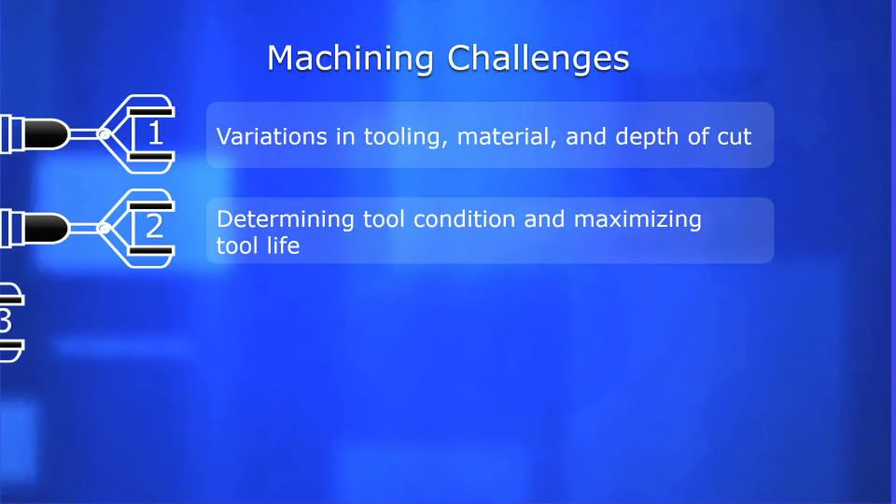Number 3: reduced reliability of skilled workers and relying heavily on unattended operations. We all know the difficulty with our labor force, specifically at the operator level. I have seen more robots in the last 2 years than one could imagine. This isn't going away. So what's next in our current climate? The lowest entry point cost-wise to satisfy orders is for customers to optimize their current equipment.

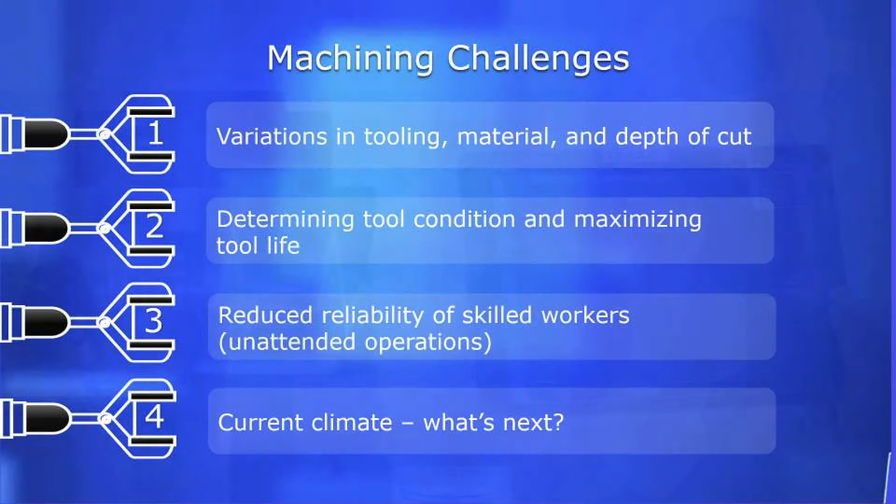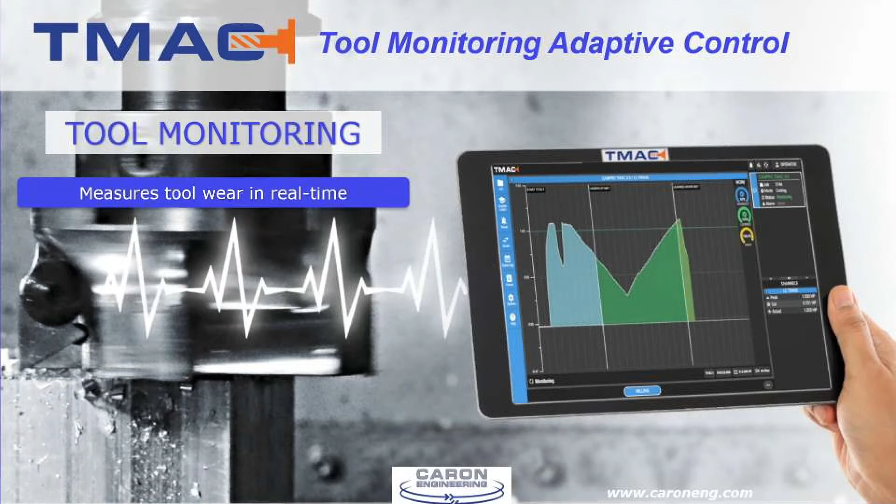So what I want to do is introduce the solution to all of these problems. That solution is TMAC. TMAC stands for Tool Monitoring Adaptive Control. In this slide, we're going to evaluate the tool monitoring aspect. TMAC measures tool wear in real time. It utilizes a high-resolution sensor to determine if a tool is worn or broken.

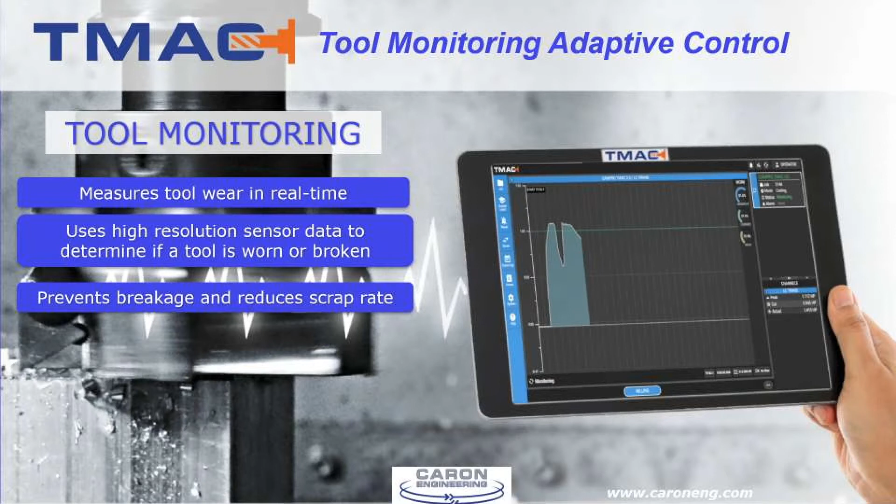We prevent breakage and reduce scrap rate by setting accurate limits around each tool and each cut. TMAC provides an enormous amount of valuable information about your cutting process. And finally, it eliminates the need for operator intervention.

So here with our adaptive control, we automatically regulate your feed rate through variations in your material, your depth of cut, and your tooling. It's going to optimize cutting, reduce your cycle time, and allow unattended lights-out operation. Adaptive also reduces the cost of consumable tooling by increasing your tool life. We do this by making 1% increment changes in your feed rate in order to react to harder and softer material conditions.

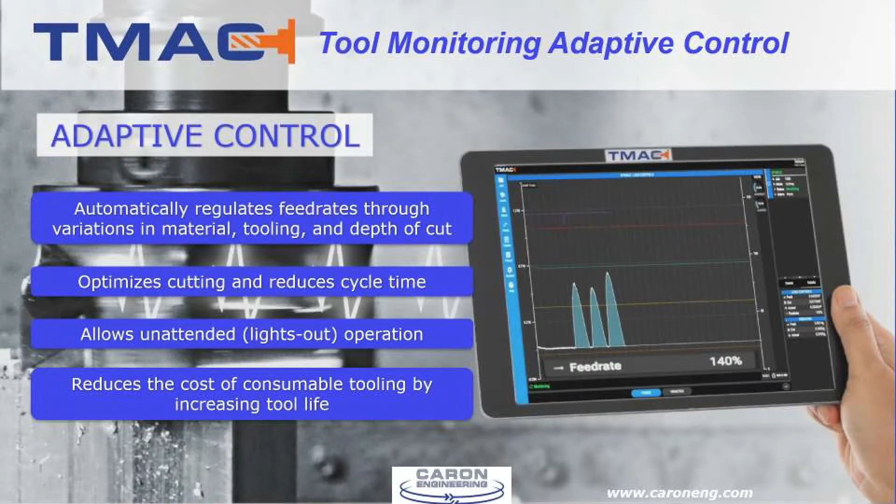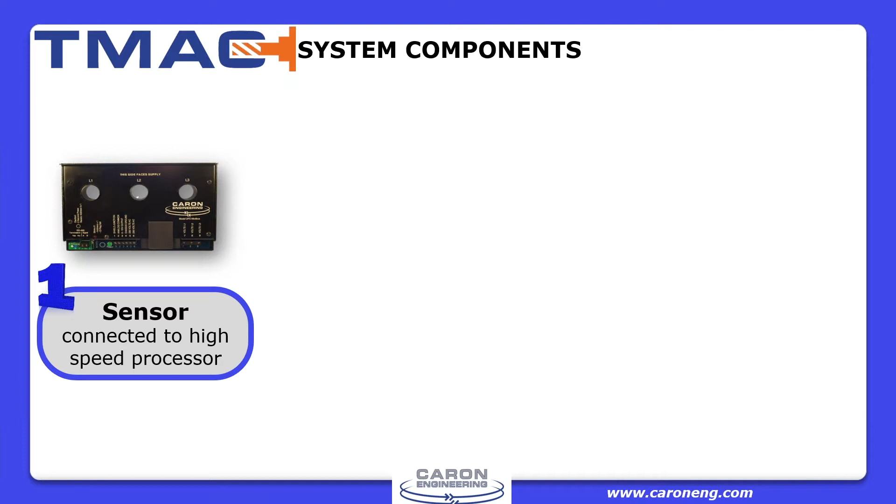So here's a pretty standard example of our system components with TMAC. First, we have a sensor connected to our high-speed processor. The sensor is an auto-scaling Hall effect transducer. It's mounted in your electrical cabinet between the spindle and the drive. This measures true motor horsepower.

Next, we have our high-speed processor. This is a dedicated Linux-based system that's installed in the machine cabinet. This connects your sensor to your CNC control. It's important to note that CNC controls only allow a small amount of processing power. That's why we use our own system. It also allows instantaneous reaction to conditions with real-time machine interfacing.

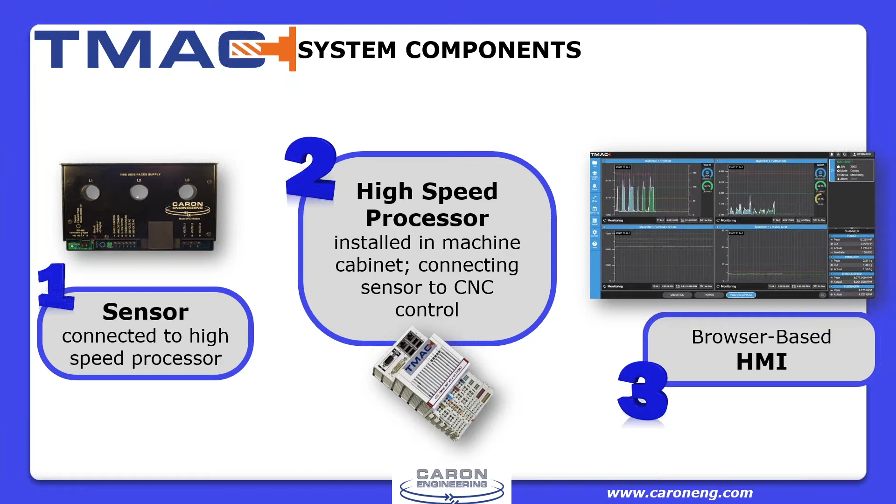The third part of our system is our browser-based HMI. The TMAC processor houses its own web server to allow remote real-time monitoring from any network device. This is also entirely configurable to different password-protected interaction from supervisor to operator levels.

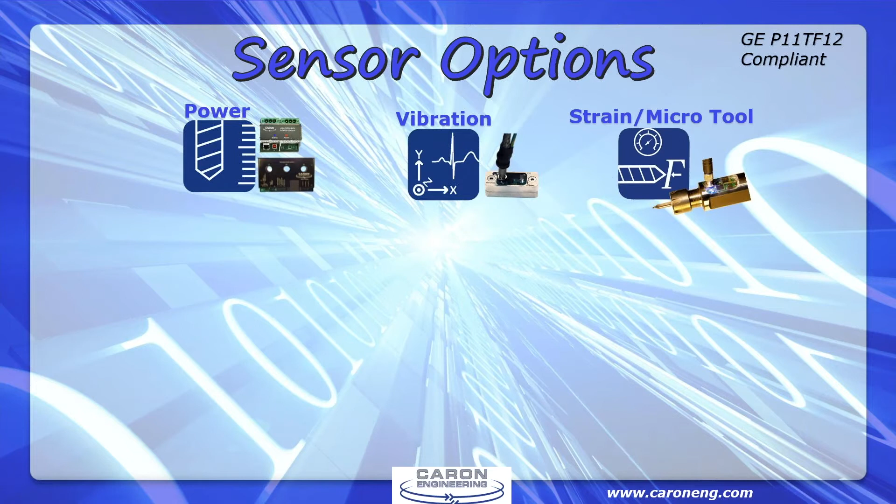Here we have some sensor options: power, vibration, strain, or a micro tool sensor. We can monitor coolant flow, pressure, and spindle speed. All of the sensors can be used by TMAC to react to anomalies in the normal machining operation. We also can take a 0 to 10 volt or 4 to 20 milliamp input as well for sensors that we don't commonly support.

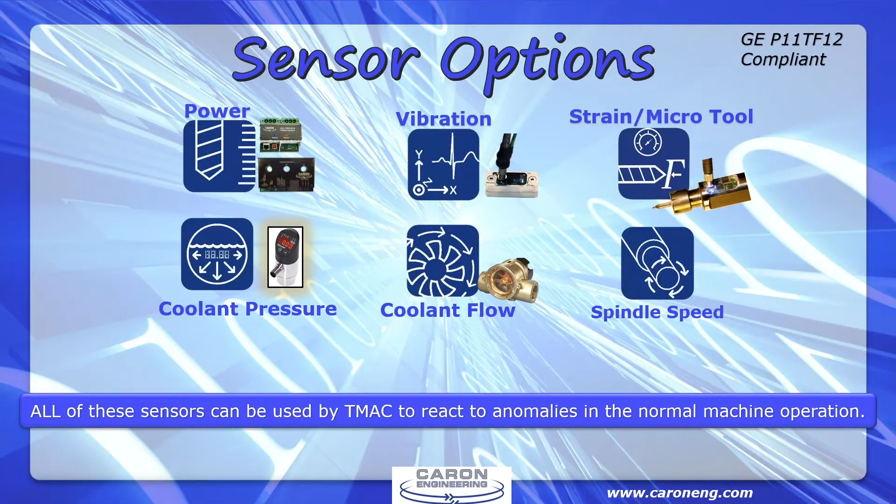Here, TMAC monitors multiple processes and sensor channels simultaneously. On this particular graphic, you can see the 4 quadrants of horsepower, vibration, spindle speed, and coolant. TMAC cannot be overloaded by any of these, and it's fully capable of monitoring all of those simultaneously and more.

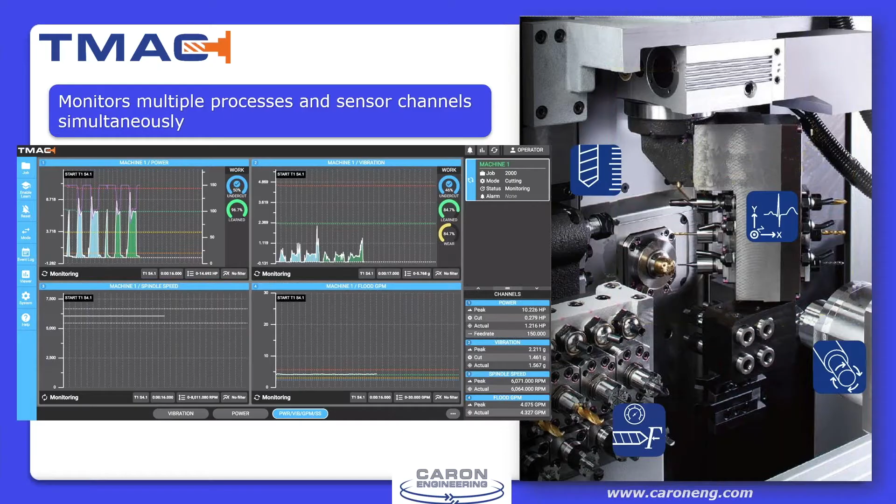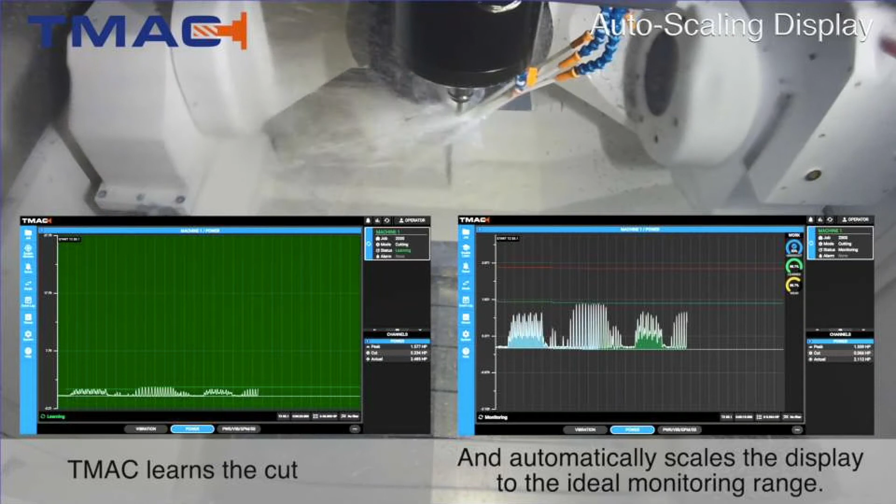So TMAC first learns the cut. The screen turns green and we grab the peak horsepower value of each tool in each cut. TMAC learns that peak power, latches onto it, and then when you're in monitoring mode, it automatically scales the display to the ideal monitoring range.

So how does it work? TMAC uses different monitoring modes based on the specific operations being monitored. So we have fixed limits, work, and adaptive control in our toolbox. TMAC learns the peak power and area under the curve, or work, of the cutting tool and can detect tool wear by monitoring these parameters.

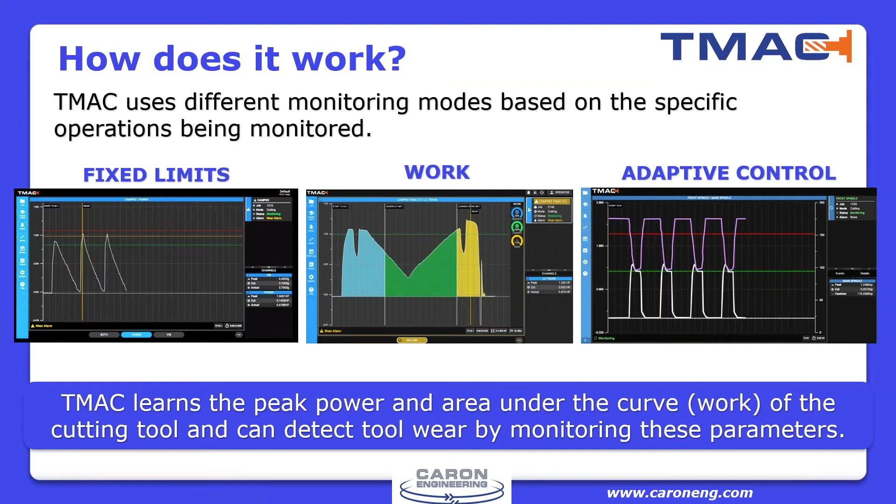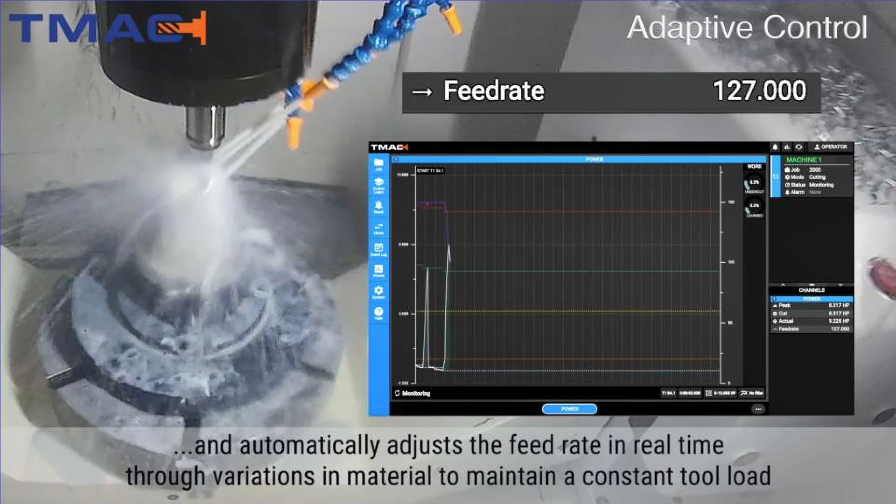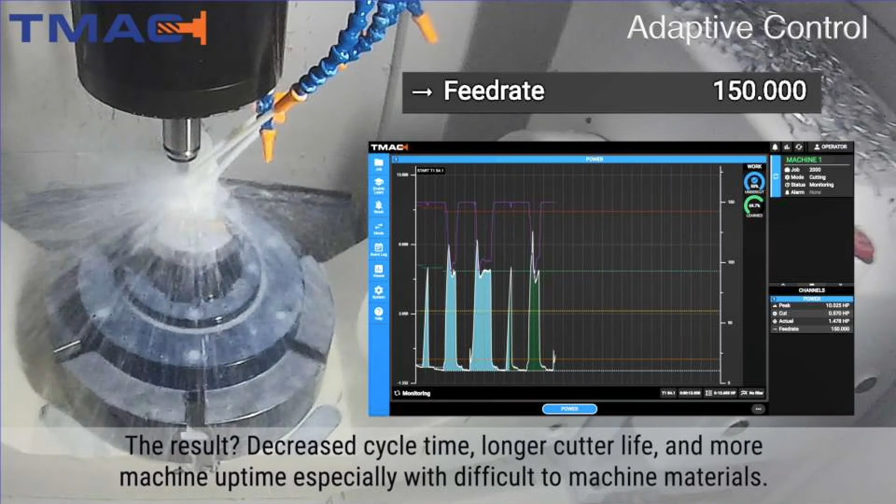Here we have our adaptive control. Without adaptive, a constant feed rate is set based on the safest or worst material condition. With adaptive, TMAC learns the optimal power and automatically adjusts that feed rate based on the load. So what's the result? Decreased cycle time, longer cutter life, and more machine uptime, especially with difficult to machine materials. With our new browser-based UI, you can access TMAC anytime, anywhere, and from any network connected device.

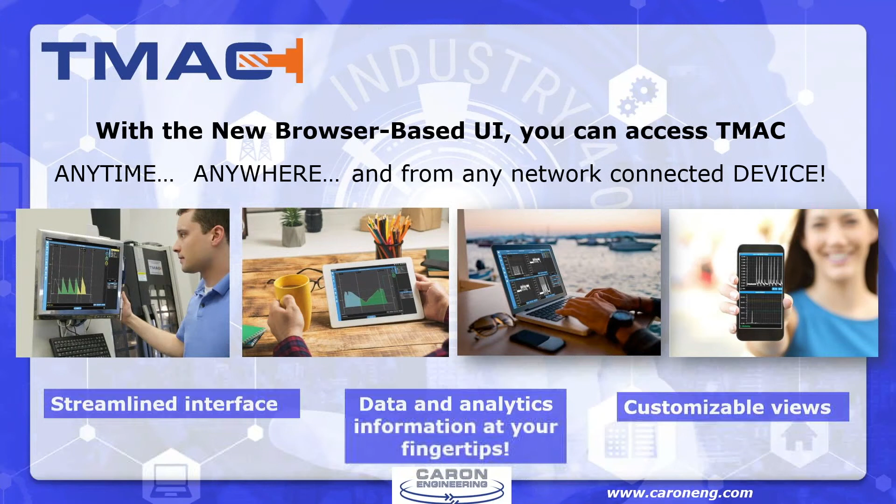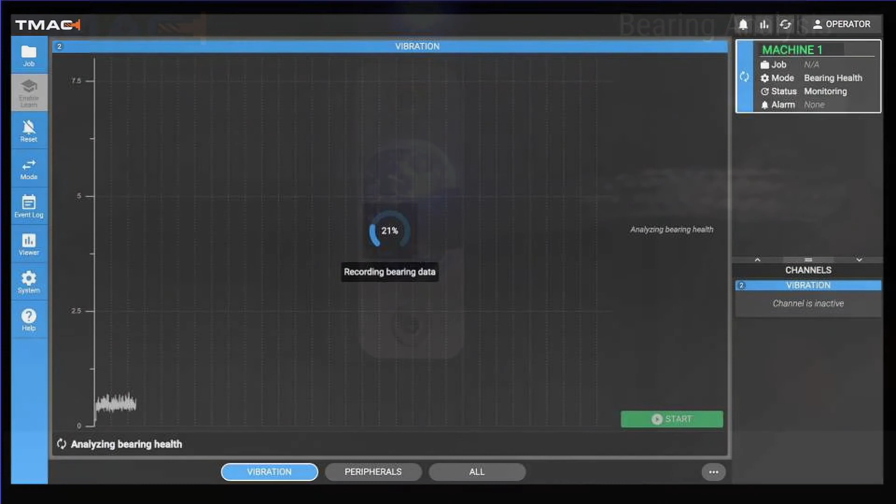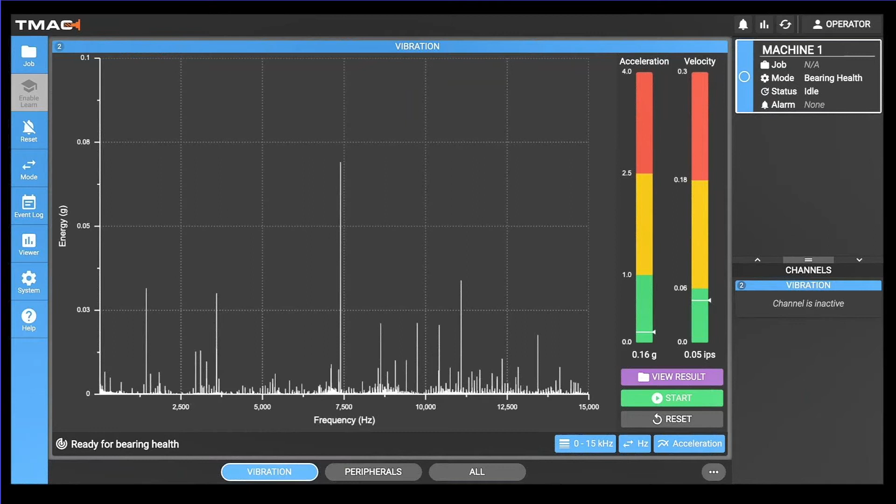By using a vibration sensor attached to the spindle, TMAC can monitor spindle bearing health. So what we do is we put a low mass tool in the spindle, we ramp that spindle up to its highest RPM, and we do a 5-second analysis of acceleration and velocity. And you have now access to your spindle being in good condition, on its way out, or bad. All of this data can be trended over time and networked to your maintenance department so they can have those data files at a glance.

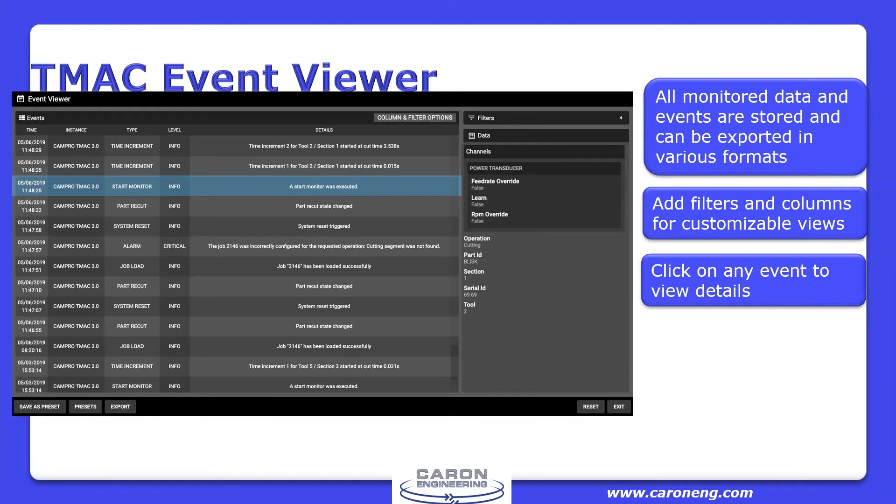Finally, we have a TMAC event viewer. All these monitored data and events are stored and can be exported in different formats. So you can also add filters, columns, and other customizable views. So you simply can click on any event and view those details. So now let's go check out our on-machine demo.

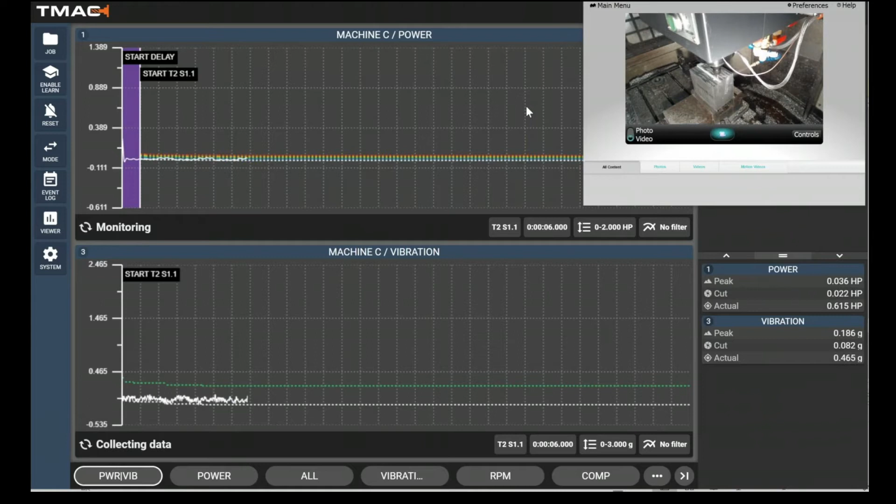What we have in the background, folks, is our TMAC 3.0 system running. In the upper right-hand corner, you see the webcam of the inside of this 3-axis mill that we're running our demo on today. So this is a 1mm drill. 1, 2, and 3. Also, it's important to note that down below, we're actually also measuring the vibration. We have a vibration sensor mounted in the machine as well.

And we're coming up with a 13/64 drill. You'll see the start command come in, long vertical line, and we have limit set. So here we're measuring these drills, these holes, using area under the curve. Once again, the blue is the satisfaction of the area under the curve. So we're saying enough power was consumed to satisfy that that drill is there. Next tool is a 1/4-20 tap. This is simply tapping the 13/64 drill.

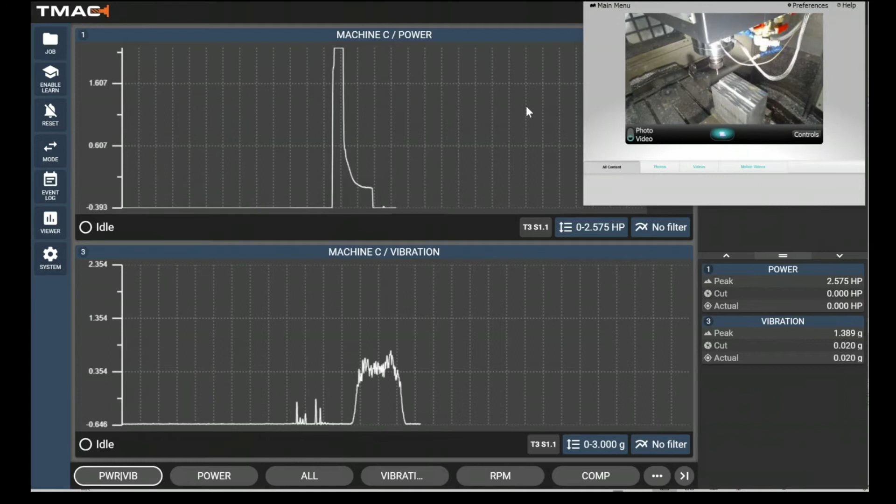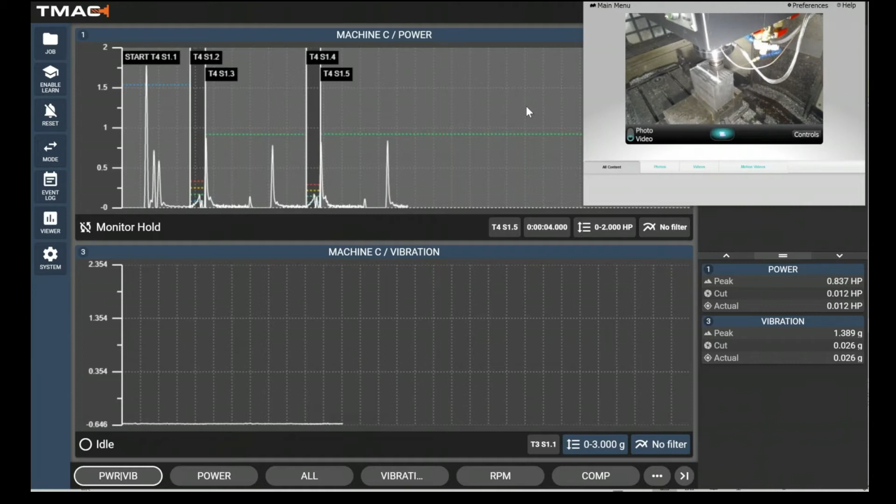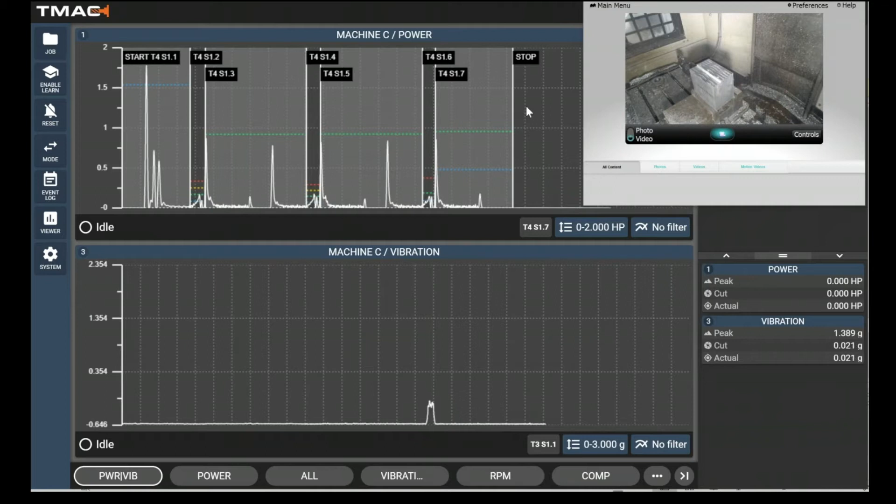Now you're going to see the screen actually flash a couple of different colors. The gray basically means we're doing a monitor hold. So in a tap sequence, and this is unique to us, you're going to capture a spike in power on the reversal of the spindle. So we actually ignore all of that and just capture the actual forward cutting of that tap. And we can set those parameters. So that's kind of what you're seeing in the screen there.

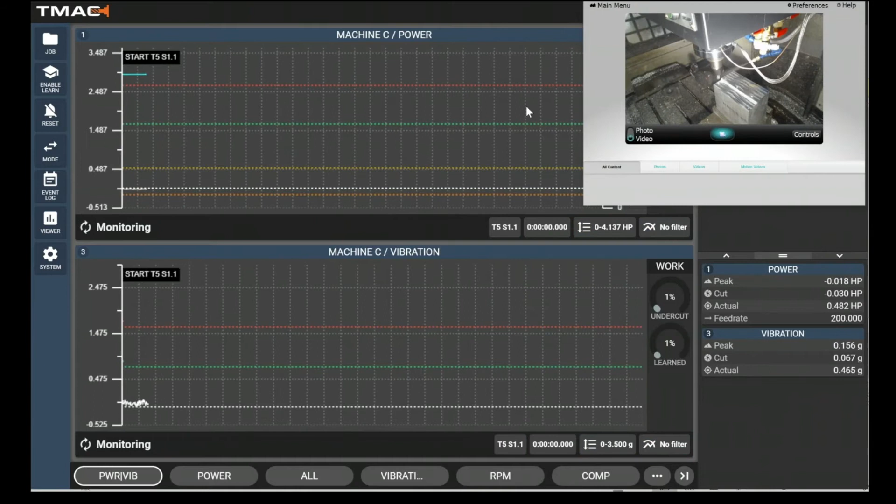And then finally, we're going to come in with that 1/2-inch 2-flute end mill. Full depth of cut on the first pass. Now this is an adaptive cut. So we are going to see the variation in the feed rate based on the amount of power being achieved by the tool. So that inverse relationship is represented there on the top of your screen. It's also interesting to note that the vibration signature follows the horsepower signature really closely.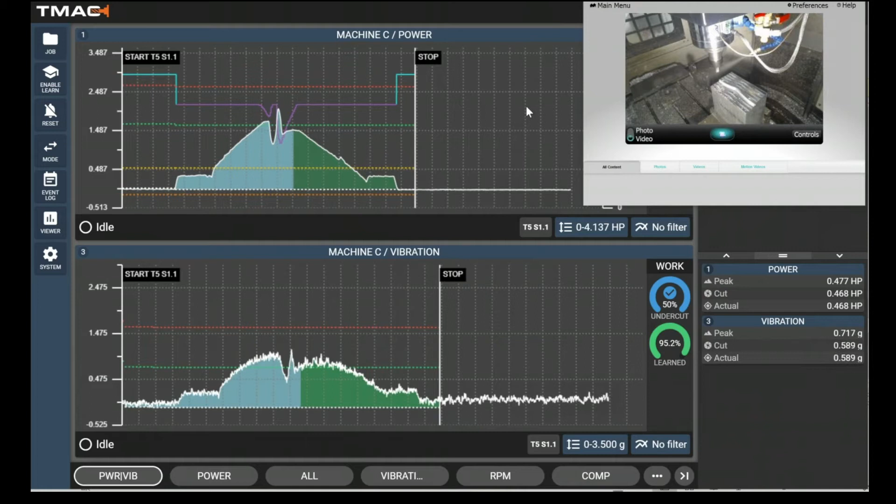Now next cut is a 1/2 depth of cut, essentially cleaning up the first pass, if you will. So we're satisfying that blue, saying enough undercut was met. That essentially will start to turn green, saying we're satisfying the cut. And if it were to get to a point where we're achieving more power and getting into a wear condition, that would then shade yellow. It's the final cut. And this is just cleaning it right up, the whole phase.

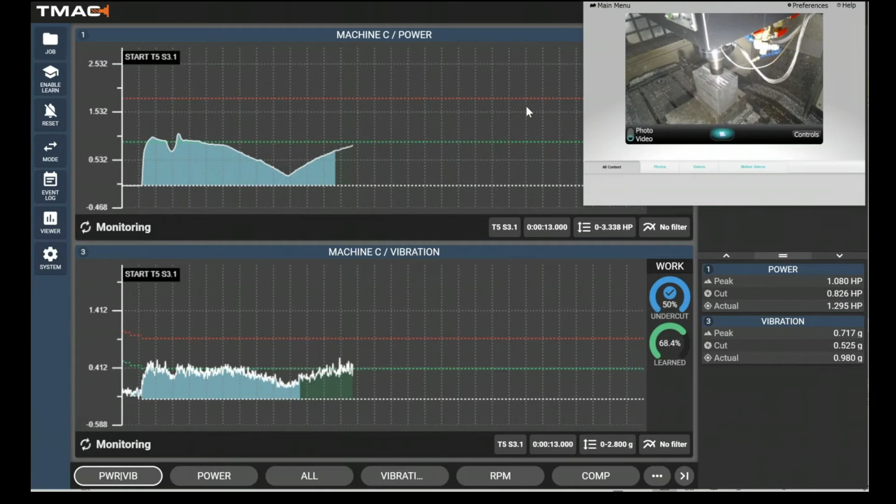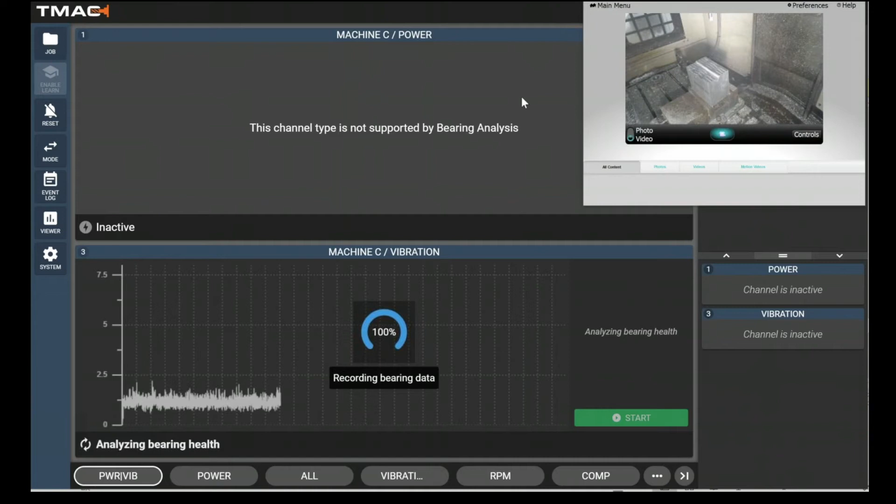And finally, we're doing a bearing analysis for you. We ramp the spindle up to its highest RPM in a low mass tool, take that 5-second sample, and do the analysis of acceleration and velocity. And you'll see the end result here in a moment. And we do know that the velocity shows our spindle is actually not that healthy.

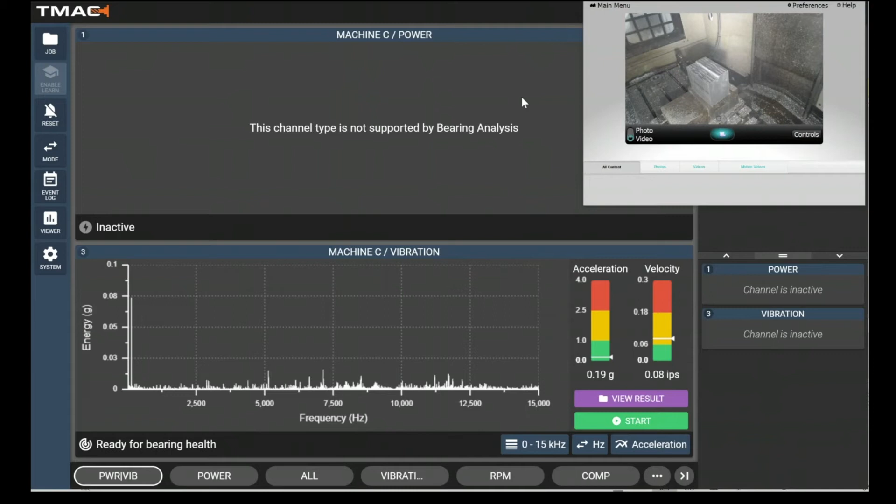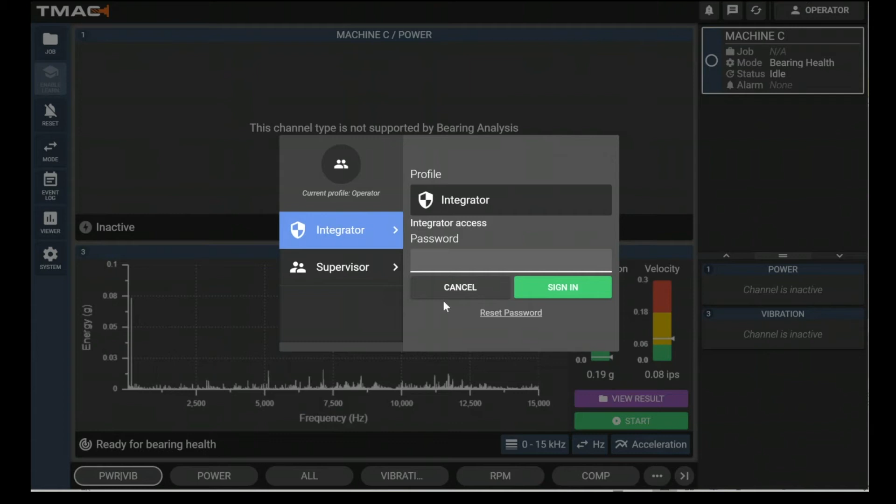So I'm going to maneuver through how to get around TMAC 3.0. First of all, on the top right part of the screen, there's the label of the machine. It could be machine number, whatever you want it to be, job, mode, or status, and if it's in an alarm state. Up here, we actually have the ability to do permissions for operator level, supervisor level, integrator level, depending on the situation, to password protect, and we can permit them to do certain functions of interacting with TMAC.

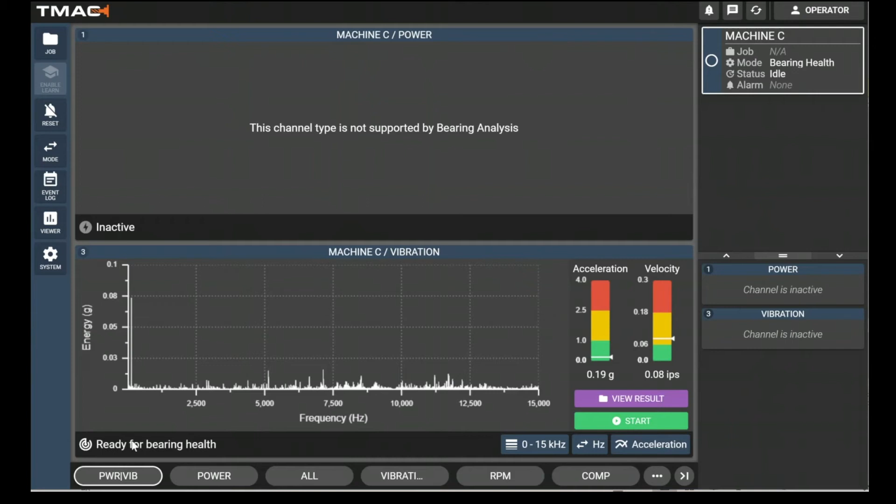So I'm going to show you down here at the bottom, we got power, vibration. You can basically create custom screens to show all of these things happening simultaneously if you prefer. Here on the left column, we have job, enable learn to turn a learn on manually, reset, mode functionality, event log, viewer, and system. So in the job, this is where you interact with your jobs. So TMAC is job-based. So once you learn a part program, it's saved. This would be how you interact with it.

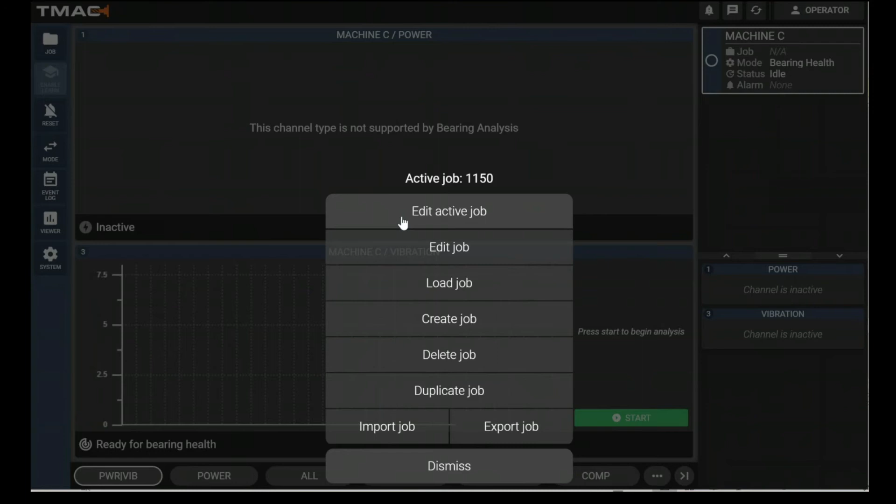So I'm going to edit active job and show you the current job that we just monitored. Tool 2, Tool 3, Tool 4, Tool 5. These are also represented by sections. So on Tool 5, we're actually doing 3 different operations. Okay.

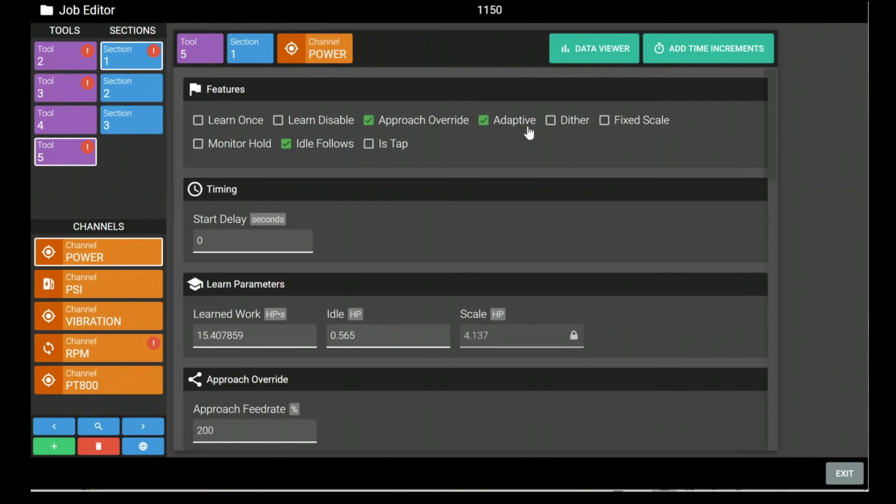The first was that full depth cut with adaptive, as you can see here by this radio button being selected. Tool 2, here's an example where we're using basically fixed limits. If you wanted to turn area under the curve on, you would simply click that to turn the work calculation on. So these are the different channels down here on the left: power, PSI, vibration.

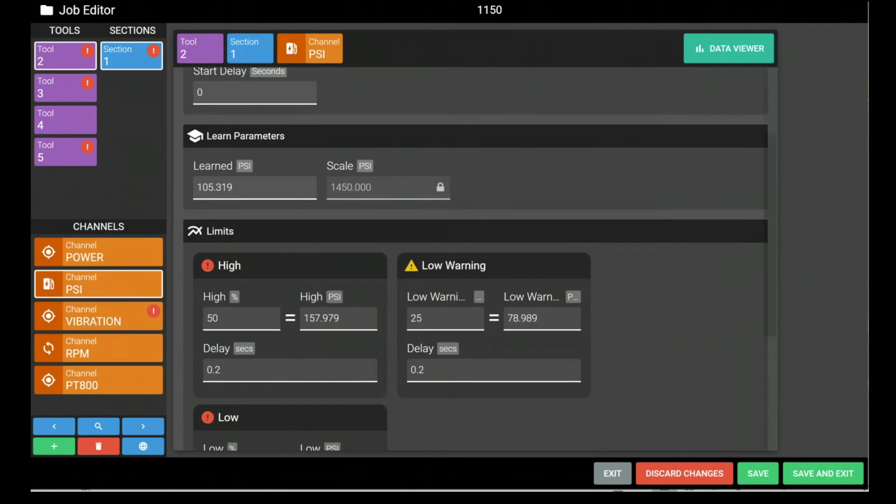This is where you essentially set it all up. This is where you set your parameters. So we learned this value here in the learn parameters, the horsepower, peak power achieved. And then this is where you set your alarm states. There's also filter options and whatnot.

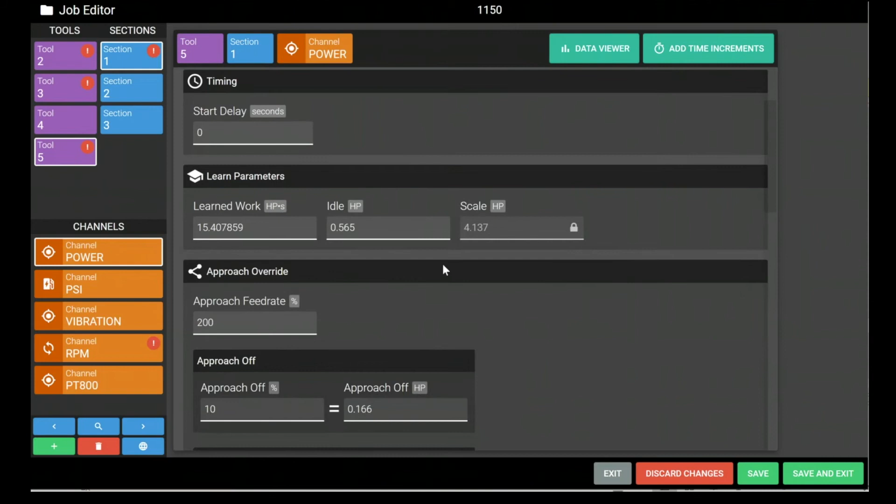It's important to note with adaptive that we can also do things like turn approach on and off, and that was that rate of change calculation I was telling you about. But we also can tell adaptive to speed up a certain amount, traditionally up to 255% of the program feed rate, but also slow it down if need be. So it really is a tool that can be used for multiple applications.

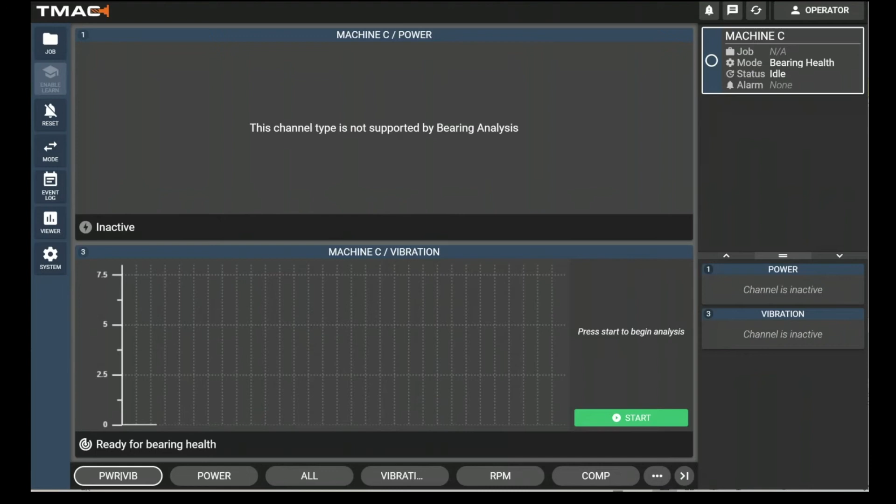I also wanted to show you our viewer function. So what viewer does is it pulls up an additional browser, just pulling it up here. We can do an analysis of bearing health, millivolt, or cutting. I want to look at cutting. So this pulls up the most recent cut, right? You can scale back and forth, previous, next.

I want to show you the power of being able to analyze a tool, for example. I'll remove this. These are all the recordings of every tool that we've been monitoring and actually learning. I'm going to add a filter, and I'm going to pull up tool 5, which is that half-inch end mill. And I want to do an analysis of when we learned it at 100% feed rate, and when we turned adaptive on up to 150% feed rate override, and do a quick analysis to see how much time we saved.

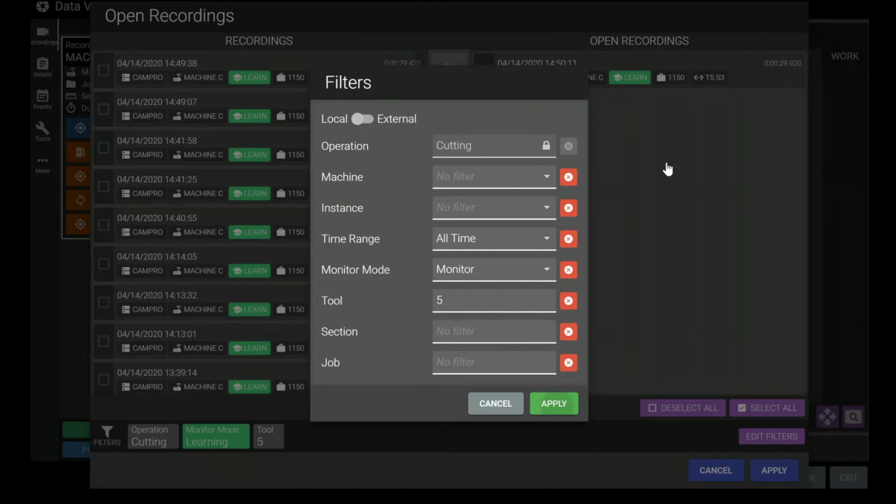So I'm going to pull up the learn file first. So I'm just adding a filter, tool 5. And I'll apply that. And I'll just pull the most recent one, and that just happened. It's all time and date stamped. And then I'm just going to pull up the monitor version of that same tool. It's also important to note tool 5, T5, S3, that's the tool and section. There's also a motor designation too if we were using a multitasking machine.

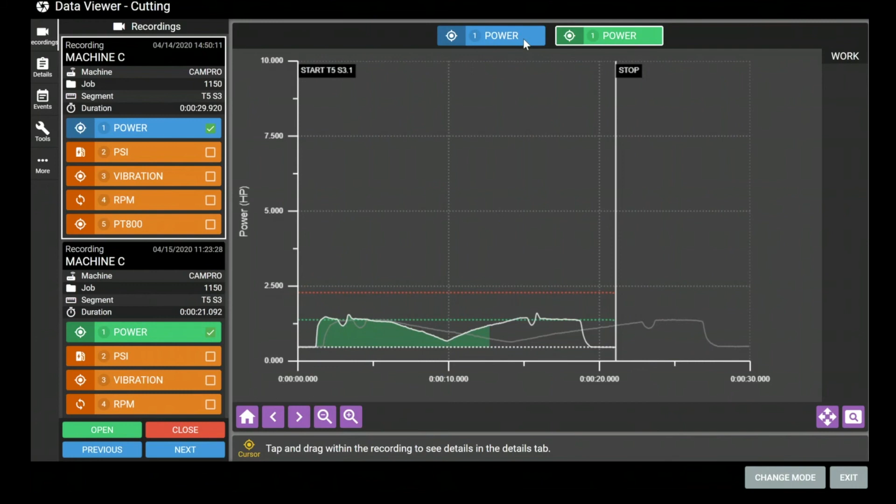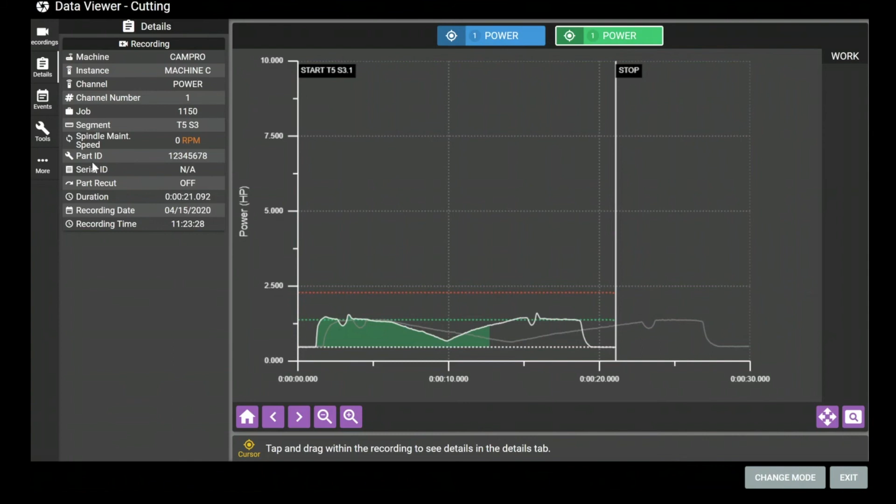Pull this monitor. So now I've got these two. I'm going to hit apply. Now they're overlaid on top of each other, so I can toggle between the two and show you that on the learned one, I'm going to pull up the details. We have details to show cursor, where you were, events as well. This duration on this particular cut took almost 30 seconds. Now with the adaptive cut, we actually are seeing the duration of 21.09 seconds. So we shaved about 9 seconds off of this tool using adaptive.

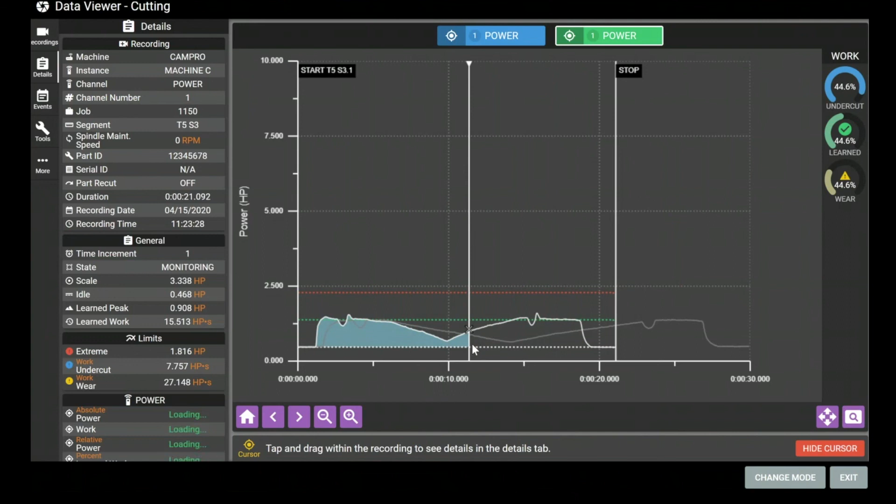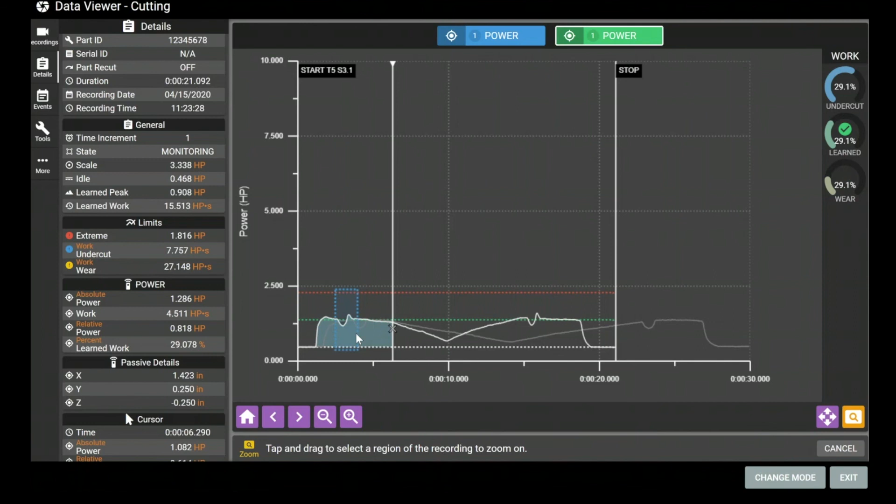Another analysis you can do, you can pan, click, zoom. So wherever you are with the cursor, we satisfied at the undercut, for example. We're going to show things like your limits, what percentage you would satisfy, the power, the relative power, but also passive details like axis position in the machine. Or we can zoom in. Maybe I want to look at this area here. I draw a box and it zooms in, and I can continue to zoom in.

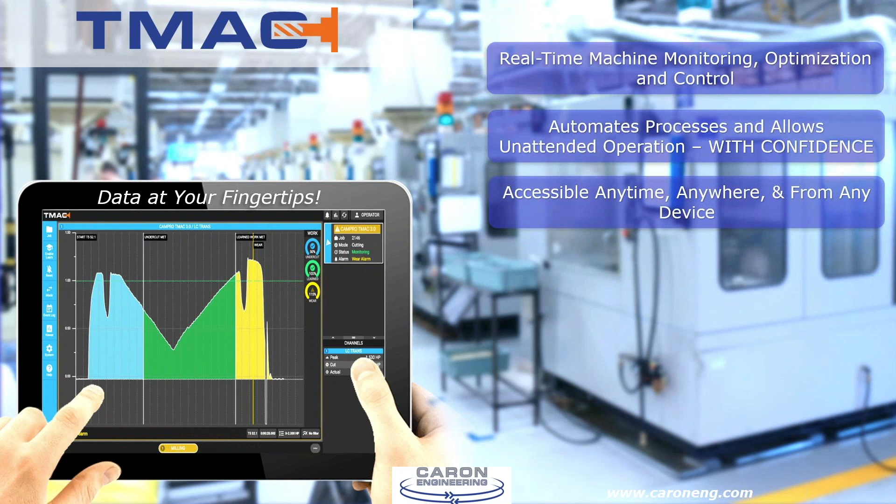So I want to recap what you've seen here today with TMAC. TMAC is a real-time machine monitoring and optimization product. It automates processes and allows unattended operation with confidence. All the data is accessible anytime, anywhere, and from any device. It interfaces with almost any CNC control, and it maximizes your tool life. It adapts to changing material, your cutting conditions, and your tooling.

TMAC makes automatic corrective adjustments on the fly. And finally, it has a multi-process monitoring capability. So now you can monitor everything that's happening in the cutting environment.